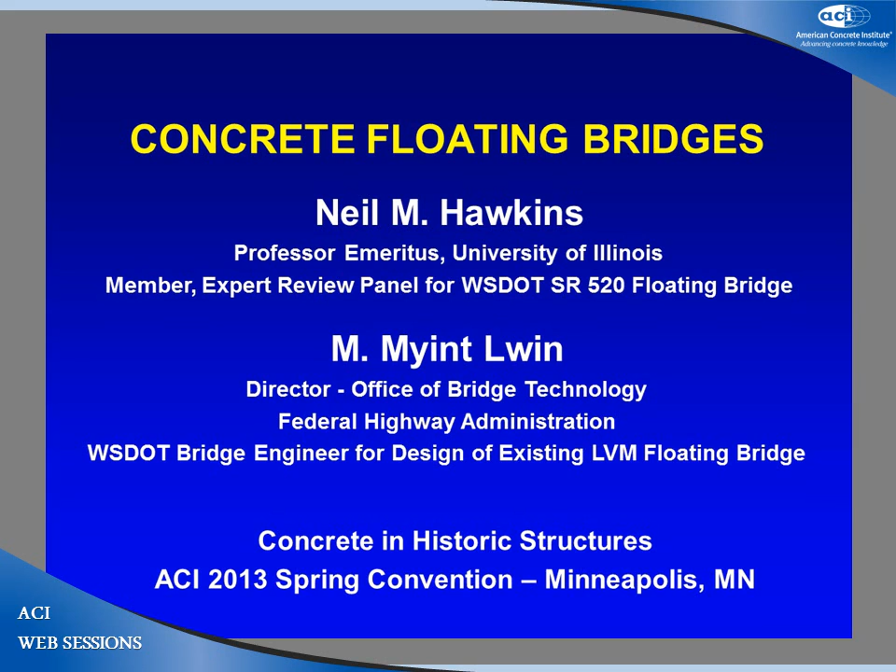Good afternoon, people. I'm a professor emeritus at the University of Illinois, and I've been involved with floating bridges in detail for some 30 years now. Most recent experience was looking at some new construction of a floating bridge in Seattle, which has sort of gone a bit wrong. My co-presenter in this is Myint Lwin, who is the director of the Office of Bridge Technology of the FHWA, and he was the Washington State Design Bridge Engineer for the existing Lacey V. Murrow Bridge, which is the bridge we're going to talk about today.

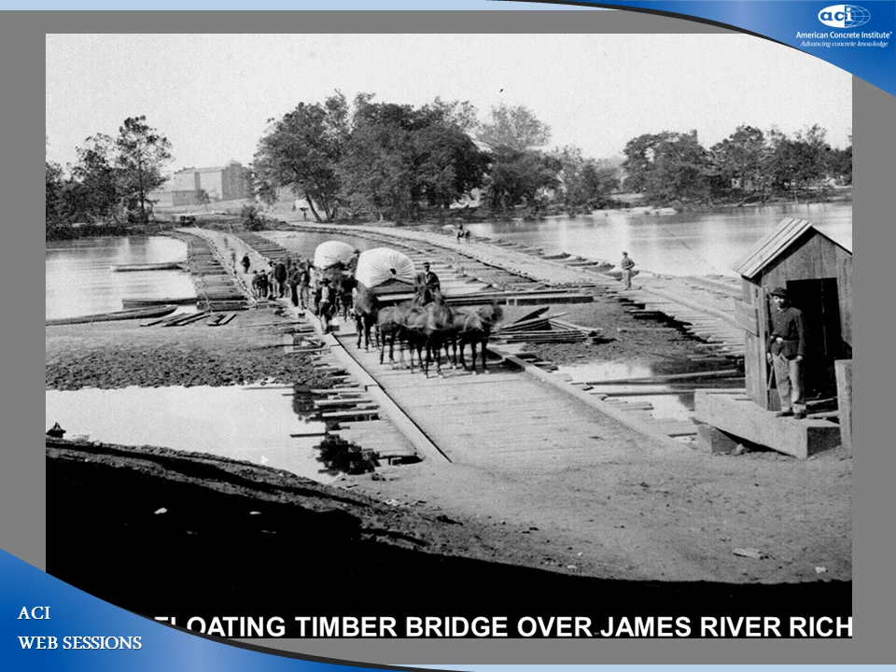Floating bridges have been around for quite a long time. The Romans used floating bridges, Napoleon used floating bridges in many of his battles, and here is one from the Civil War, a floating bridge over the James River in Richmond, Virginia.

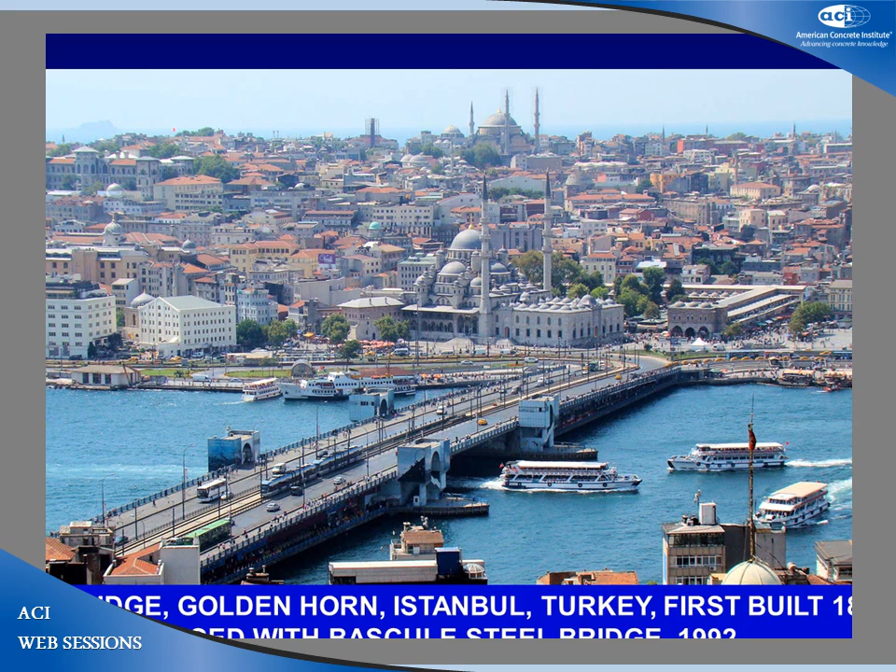Of course, one of our most famous floating bridges is the bridge across the Golden Horn in Istanbul, Turkey. It was first built in the 1800s, but has now been replaced with a bascule steel bridge. I keep suggesting to the Washington State Department of Transportation that they could solve some of their funding problems if they just allowed the construction of restaurants in the space between the pontoons of the floating bridge.

Around the world, there are some 16 different floating bridges which are concrete. I want to point out that in the United States, the main ones are in Washington State. There is one up at Kelowna in British Columbia, and there is another one over in Pearl City in Honolulu. There are some famous, more recent ones in Norway, and you may have seen an article in Concrete Briefs today talking about a new one they're going to build in Norway, which will be a combination of a bridge and a tunnel. So this advances all the time.

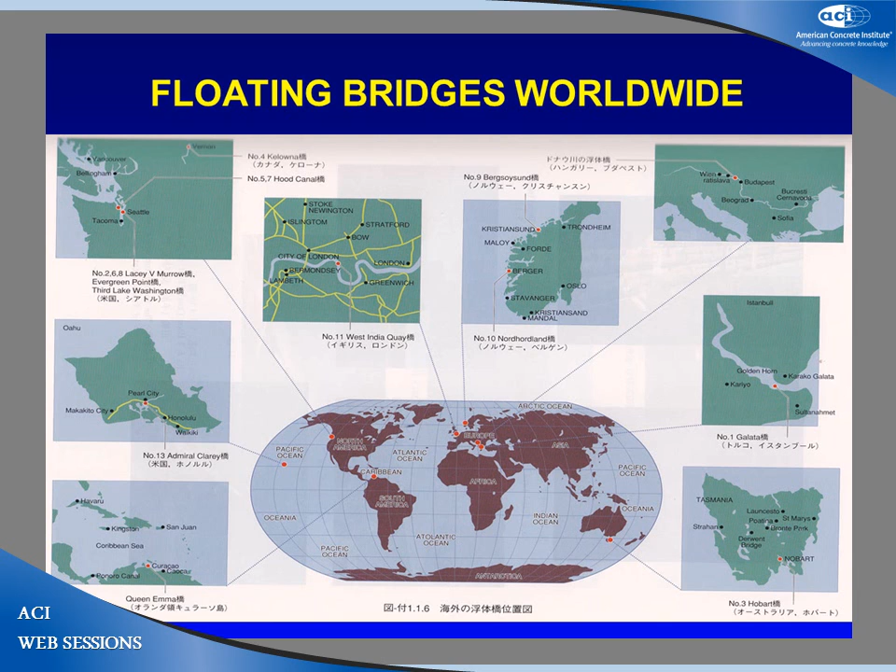Now I'm going to change pace, but this is a significant factor. There are concrete ships. Most people know that there have been concrete ships, but they always come along during a war when we lose a lot of steel. So instead we think, hey, can't we build in concrete? So in World War I, we built 12 concrete ships.

And there's the SS Palo Alto. I give the dimensions: 419 feet long, 54 feet wide, and 35 feet deep. Just carry those dimensions in your head.

In World War II, we had 24 ships. As a graduate of the University of Illinois, most of you will know something there called Talbot Lab, which is where the first concrete experiments were done. There's the SS Arthur Newell Talbot, named after the same person, 336 feet long, 54 feet wide, and 35 feet deep. If you want to look more at concrete ships, go to the URL 'concrete ships' and you'll find a history of every one of these concrete ships and where there may be remains or still floating.

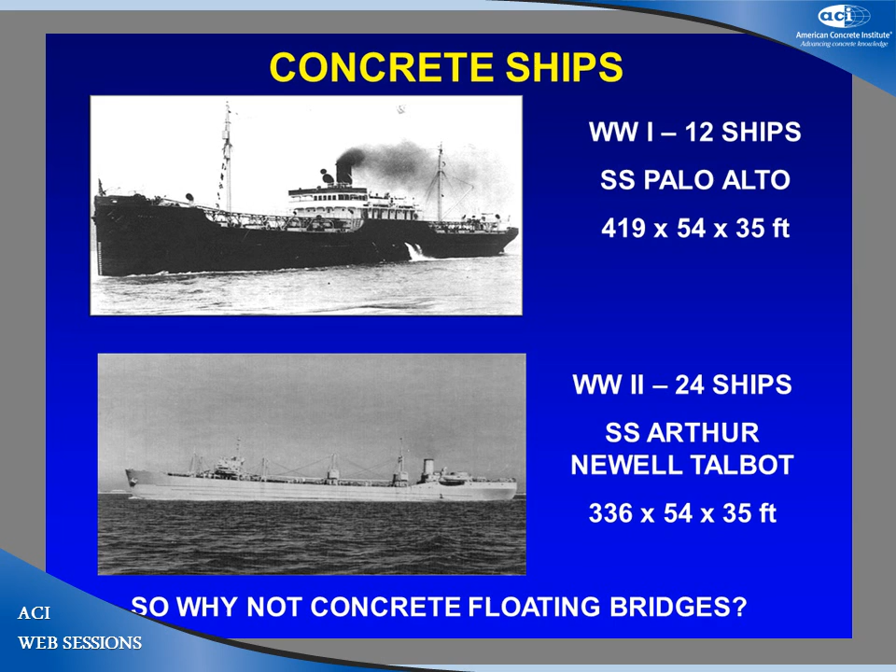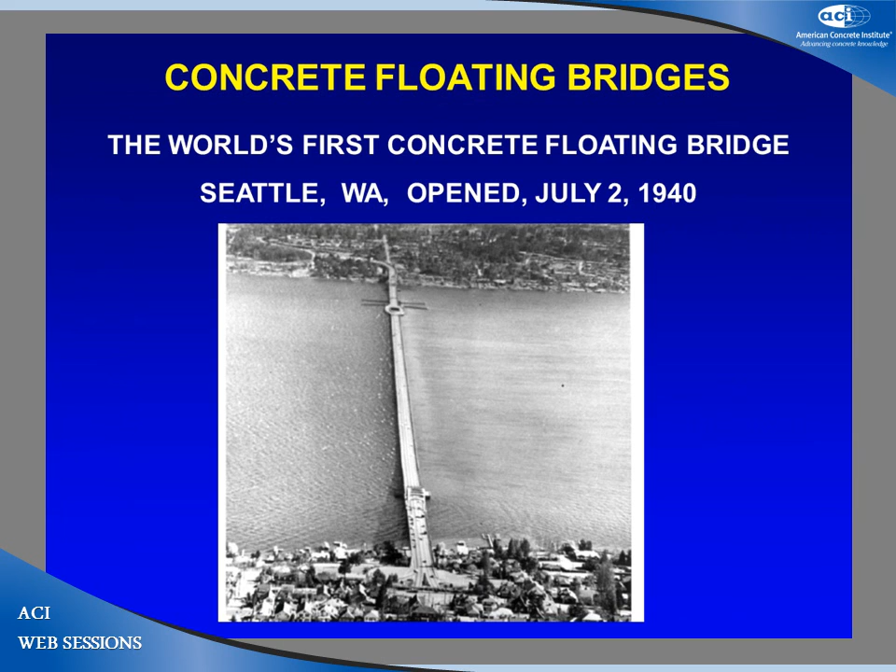So if you could build concrete ships, why not build concrete floating bridges? And that's what happened in Seattle. The world's first concrete floating bridge opened in Seattle on July 2, 1940, and there's a picture of it.

Why build a concrete floating bridge? Seattle had a problem. I really appreciate the last speaker because she talked about Spokane. What we had to do was somehow get from Seattle through the mountains, which are the Cascade Mountains, and there's a pass there of about 3,000 feet. But the rest of the mountains are 8,000 feet, and Mount Rainier is 14,000 feet, and it's pretty difficult. So that was one pass.

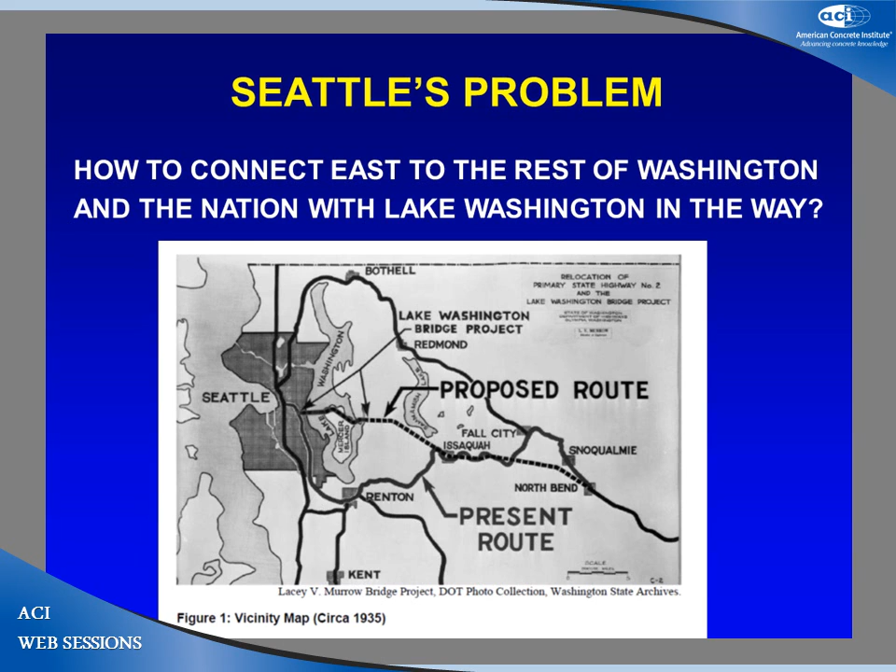But there were a few challenges. First, the depth of the lake and the soils. The lake is a fjord, and it's 200 feet deep, and after you get through the 200 feet of water, you get 200 feet of soft soils in many places, particularly near the banks.

Second, the place had to remain open to shipping, and there was a limit of 10,000 tons on the ship. That's because the Corps of Engineers had built some locks to protect Lake Washington from salt water. Lake Washington is fresh, Puget Sound is salt water, and that size would only take 10,000 ton ships.

But then, of course, you had this problem of winds can develop, and there's a fetch to this site of about 10 miles, and for that, the maximum winds blowing from the southeast could create waves up to 9 feet in height.

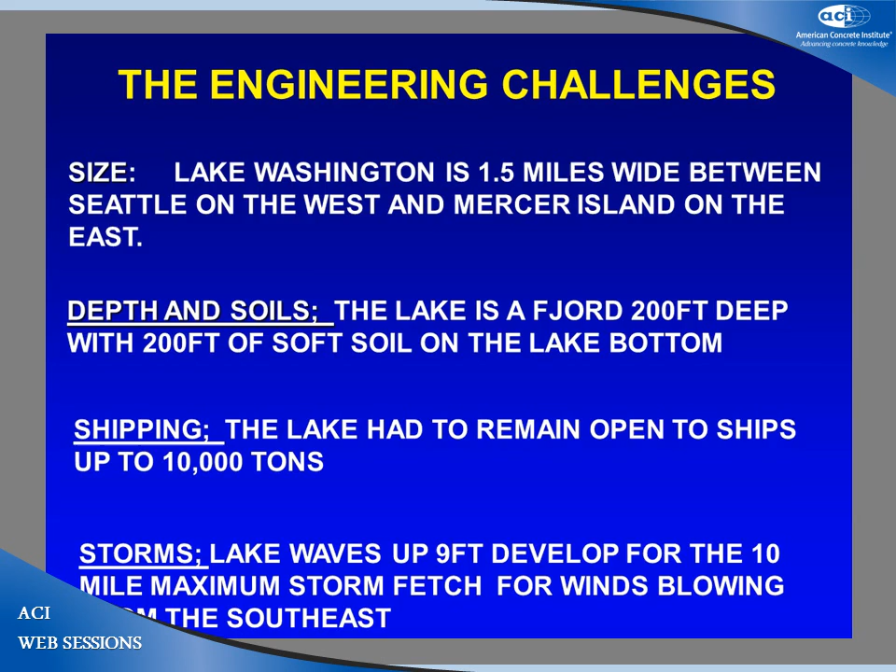So that's a challenge. Along came an innovator, and his name was Homer Hadley. Speaking at an ASCE meeting when he was 36 in 1921, he proposed that they build concrete ships connected together to produce this bridge. He'd worked in the Philadelphia shipyards building those concrete ships in World War I. His proposal was for a bridge made of interconnected concrete barges.

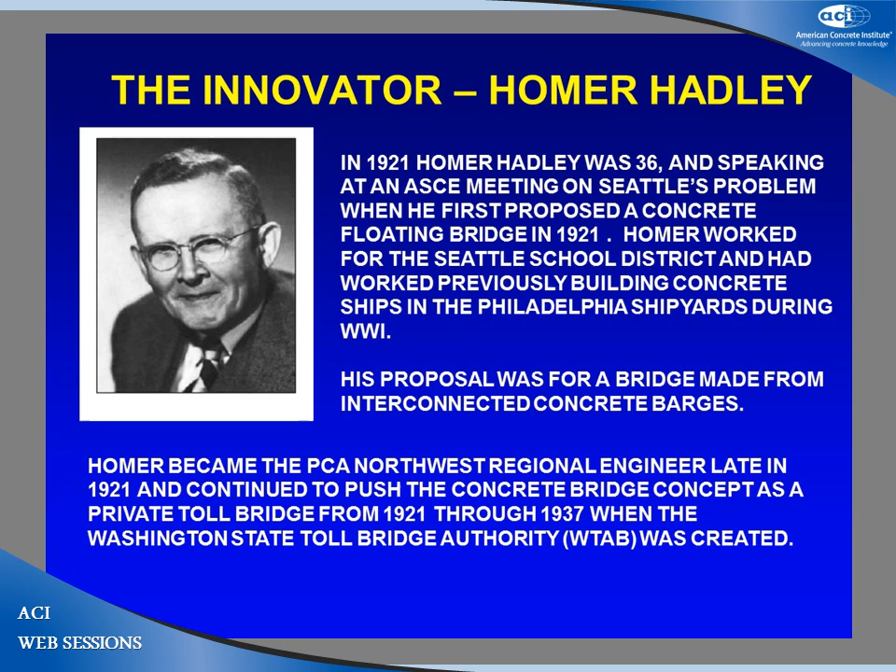Homer became the PCA's Northwest Regional Engineer late in 1921 and continued to push the concrete bridge concept as a private toll bridge from 1921 through 1937. But trying to sell this in the middle of the Depression, well, a concrete bridge salesman has difficulties. Okay, so that's what he did.

Then along came a new, young, bright person called Lacey V. Murrow, and he was very capable and very persuasive. Politically, it was amazing. By the age of 28, he was the director of highways in the state of Washington. And from 1933 to 1948, he was chief engineer of what then became the Washington State Toll Bridge Authority.

And then under his direction, there were two major bridges started. The first, the original Tacoma Narrows Bridge, colloquially called Galloping Gertie. And then this bridge, the Lake Washington floating bridge, the first one, colloquially called Gurgling Gertie.

He resigned his position from the Washington Transportation Authority at a very propitious time, 2 months before the Narrows Bridge failure, and he entered the Air Force. He retired as a brigadier general and served extensively in combat in World War II and in the Korean War, and is now buried in Arlington Cemetery.

He also has a famous brother, Edward R. Murrow, and there he is with his brother in World War II.

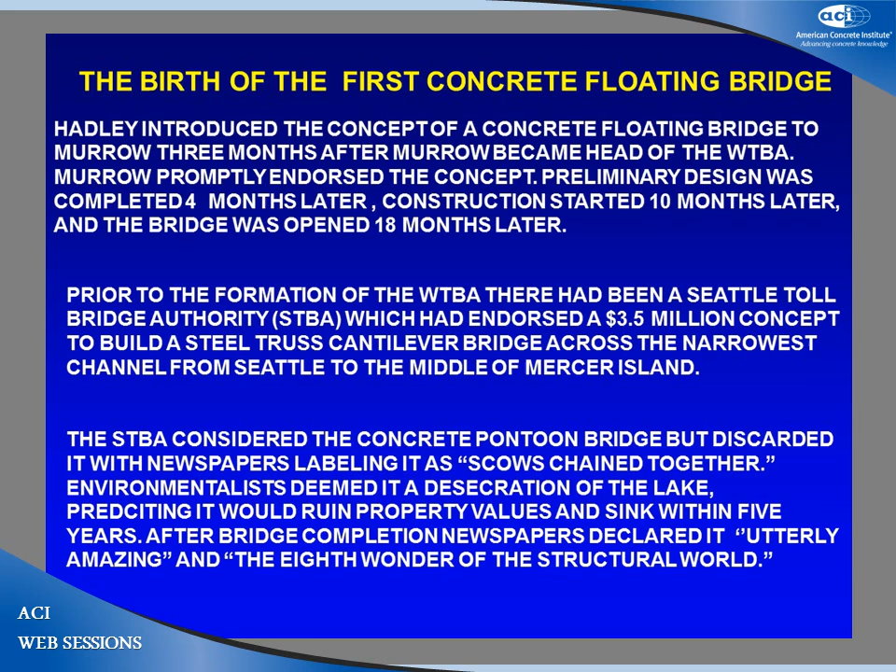The Seattle Toll Bridge Authority considered the concrete pontoon but discarded it, with the newspapers labeling it like scows chained together, and environmentalists deeming it a desecration of the lake and predicting it would ruin property values and sink within 5 years. After completion of the bridge in 1940, the newspapers declared it to be utterly amazing and the eighth wonder of the structural world. So much for newspapers.

All right, so why a floating bridge? The location was the most direct route. The great depth to firm foundation made tower construction very challenging. Because the lakes were controlled by locks, there was a regulated lake height and very little current, so that made water-to-land transitions easy. The whole idea that the thing could be built within 2 years was amazing.

In 1935, the estimated costs were: for the floating bridge, 7 to 10 million. For a suspension bridge, 35 to 50 million. And a tunnel, if they could build it, 50 to 100 million. That gives you some sort of ratio. So the concrete bridge was going to win out. The most recent concrete bridge we're building is estimated to cost 800 million. And why concrete?

Why not wood or steel? Well, the dead load of concrete provides more inertia than a steel or wood floating bridge, and therefore more resistance.

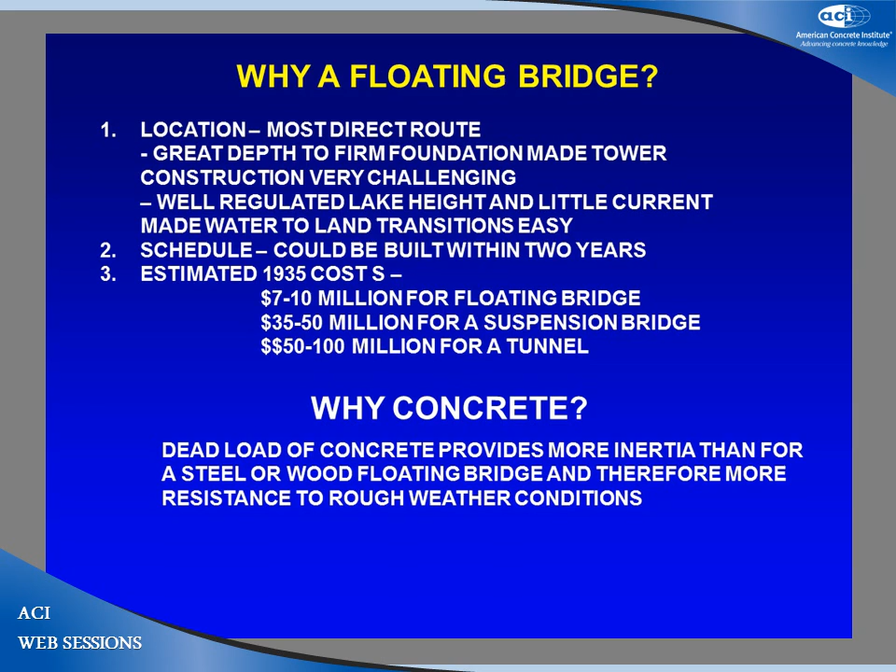To the weather conditions. This is the layout of the 1940 bridge. It's hard to see, but Seattle's on the left, Mercer Island is on the right. You've got the profile of the lakes, and the key features are that it's cellular pontoons with an integral roadway. We now build cellular pontoons but elevate the roadway above it on a separate structure.

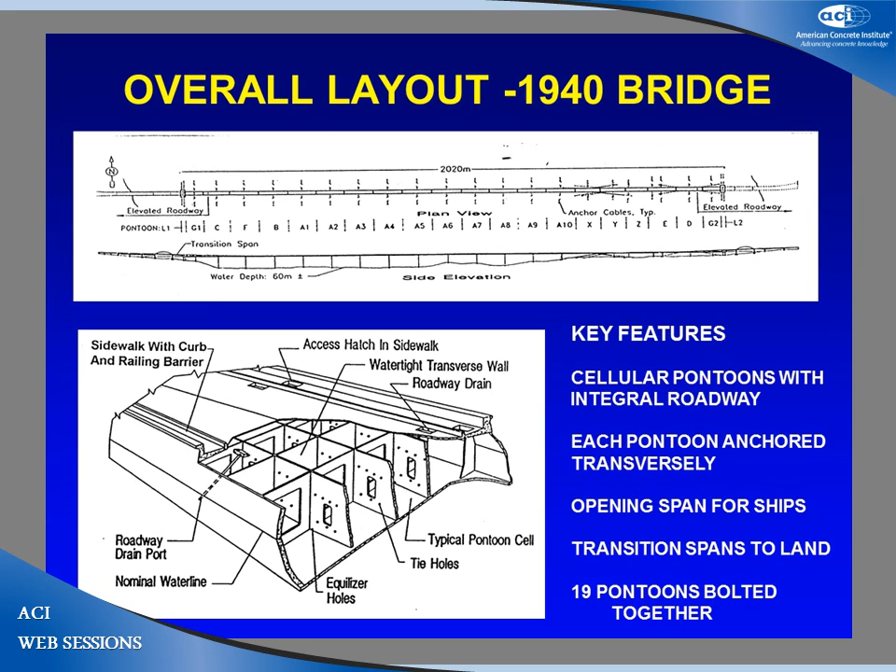Each pontoon is anchored to the lake bottom transversely. You had to have an opening span for ships, and you had a challenge in building the transition spans to the land. The bridge consisted of 19 pontoons bolted together, and the same concept we continue to use in the new bridges built today.

So if we draw the critical elements, you have the pontoon in the middle, the little thing, and long anchor cables that go out. So the anchor offset is about 700 feet, and the anchor tension is typically 120 kips.

So we're building another one of these, a cross-section of which is shown down there at the bottom. If you look at where these anchors are going to be, they've dropped anchors down now, and the whole lake looks like massive lobster pots all the way across it, because they're going to pick up these things and thread those chains through afterwards.

The pontoon dimensions, look at them: 1940, 359 feet long by 59 feet wide by 14 and 2/3 feet deep. Doesn't it remind you of a concrete ship from World War I?

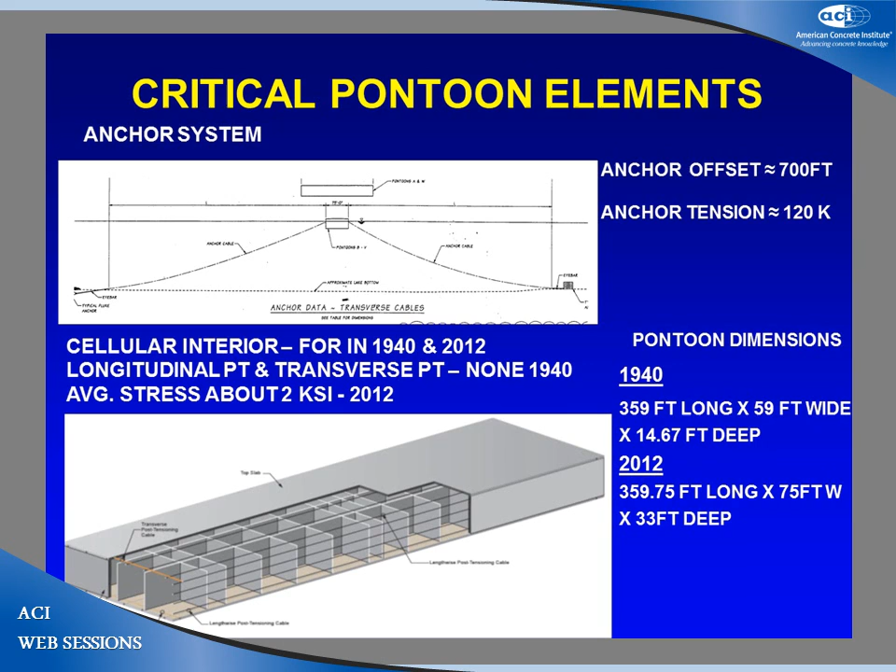And then in 2012, we've advanced a lot. We've gone to 359.75 feet long, 75 feet wide, so a bit wider there, and 33 feet deep, because we're putting so much more load on each one of those pontoons. We follow the same type of construction.

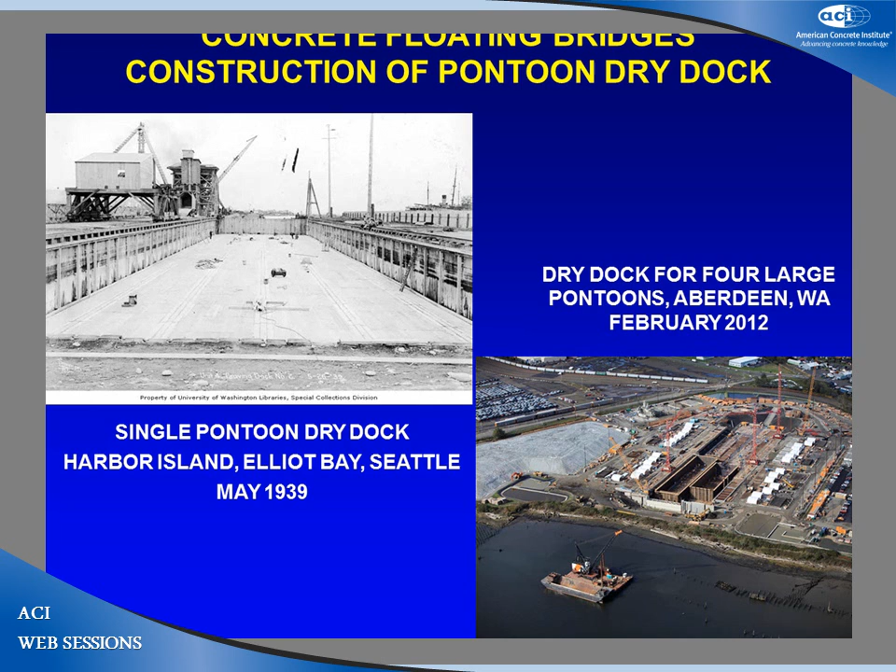On the left, we have the dry dock for the original construction, which was built at Harbour Island in Elliott Bay in May 1939. On the right, we have the current dry dock for construction of the pontoons in Aberdeen, Washington, picture from February 2012, and we're building four pontoons at one time.

The first construction was almost a continuous pour for the Lacey V. Murrow Bridge in 1940. 36 hours was the time it took to pour the first pontoon, always wheelbarrows dumped into the formwork.

Now it's so much deeper, it takes so much longer, and they do it in 6 different sections.

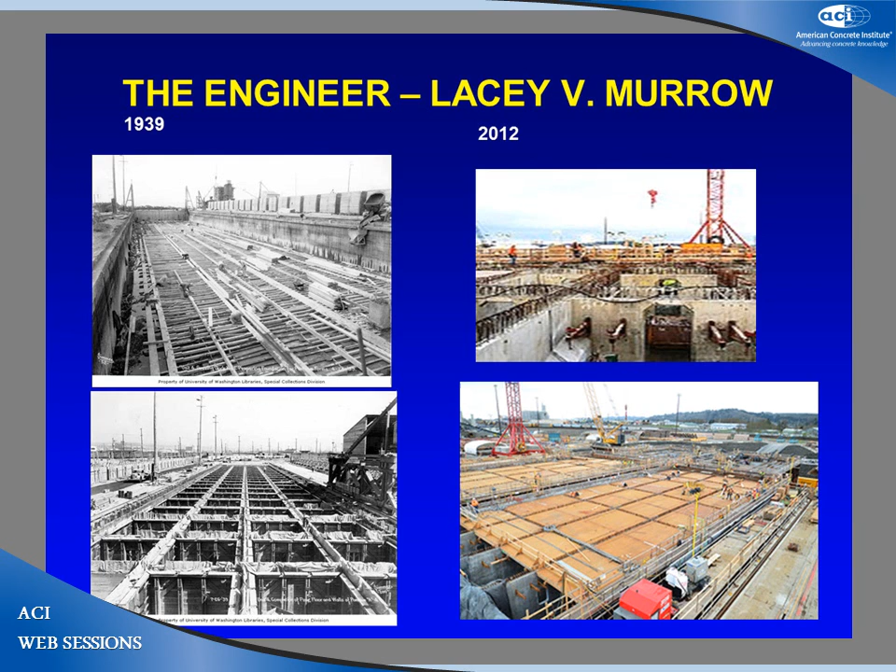We have to build these anchors. On the left, we see what was done in the 1940s. The pontoon is not nearly of the same depth, but you have to take this anchor and put it through the middle of the pontoon, which is the steel bit you see there, and then they're forming up the wall underneath that steel bit. Then you have to lower down the anchor into the water.

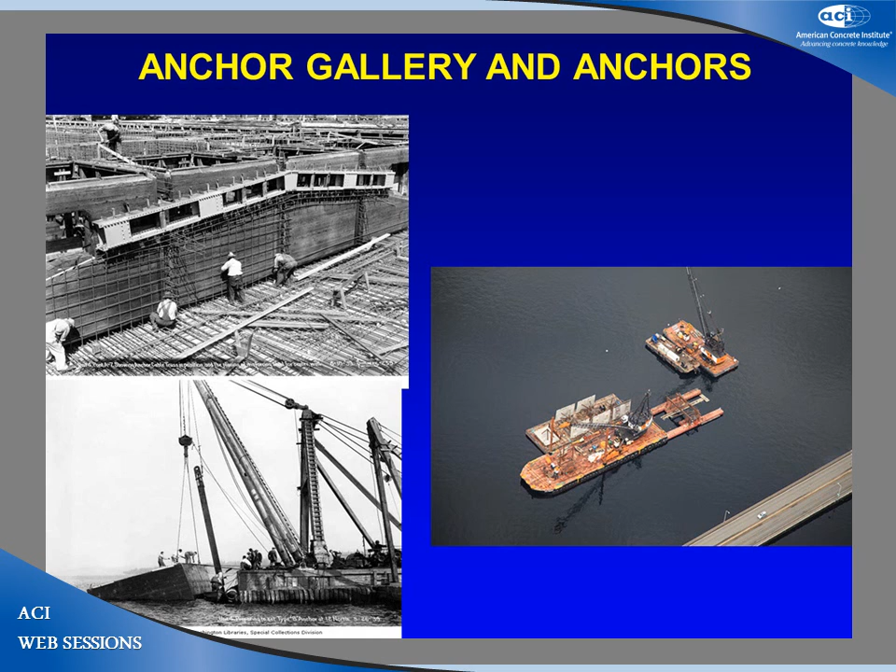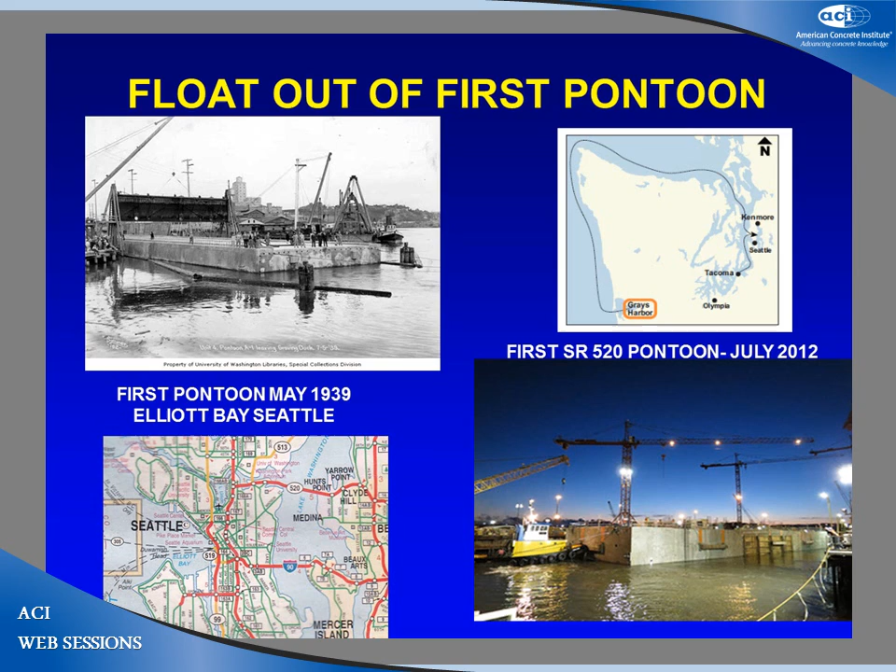Of course, it also means that the pontoon spends quite a bit of time in salt water before it ever gets to the fresh water of Lake Washington, and that's why you don't want it to crack.

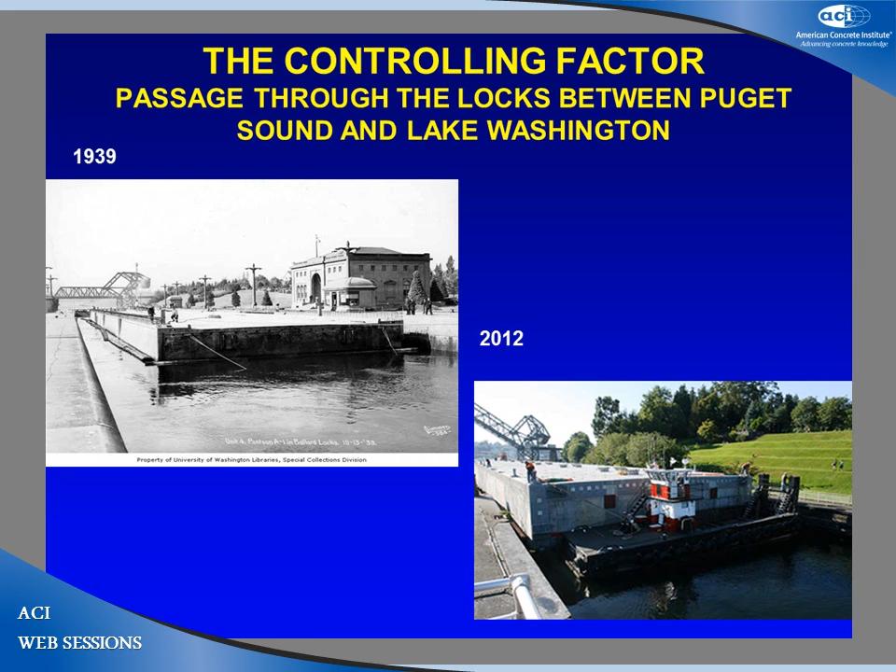To retrofit the next ones coming through, we've had to post tension top and bottom in the transverse walls, reducing it to 6 inches either side.

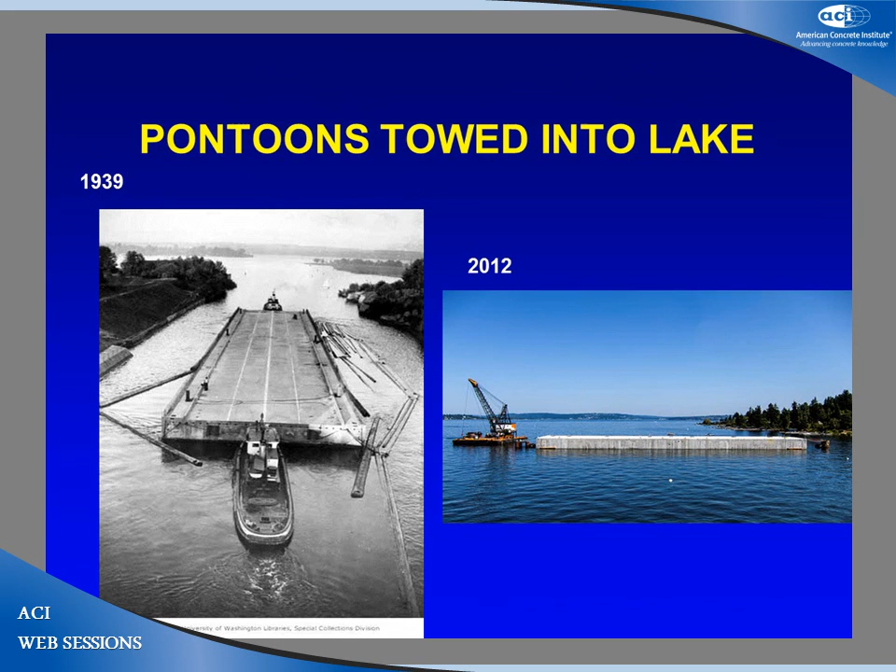That one still has to come through the locks. It'll be interesting—they're then towed through the ship canal, past the University of Washington. This is the original pontoon with the roadway in place. Now we've got the pontoon for the new bridge sitting out on the lake without any roadway yet put on it, and much opportunity for restaurants.

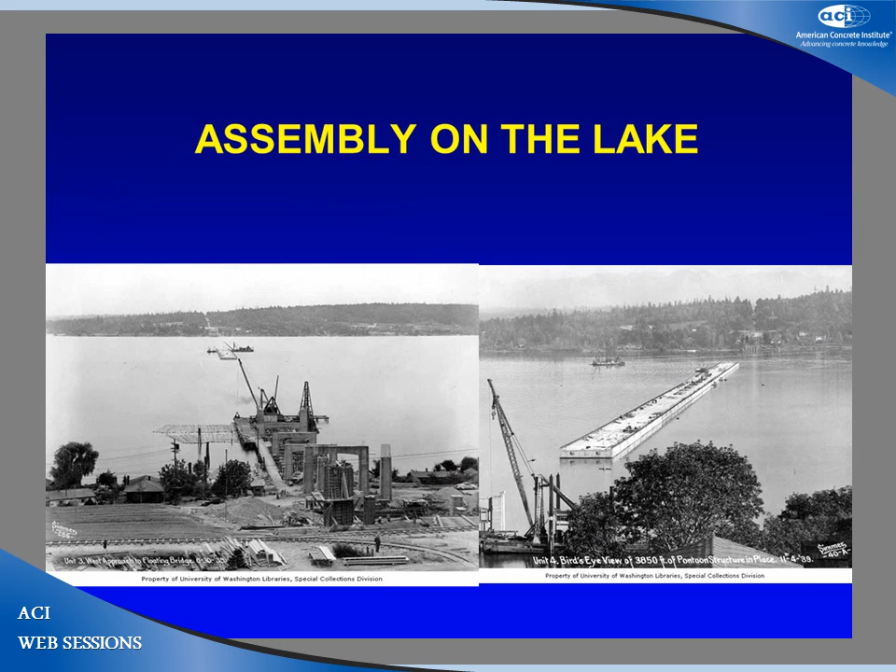When this bridge blew down in a storm while it was being retrofitted in 1990, the first pontoon that broke was in the middle—that was also the first pontoon that had been constructed.

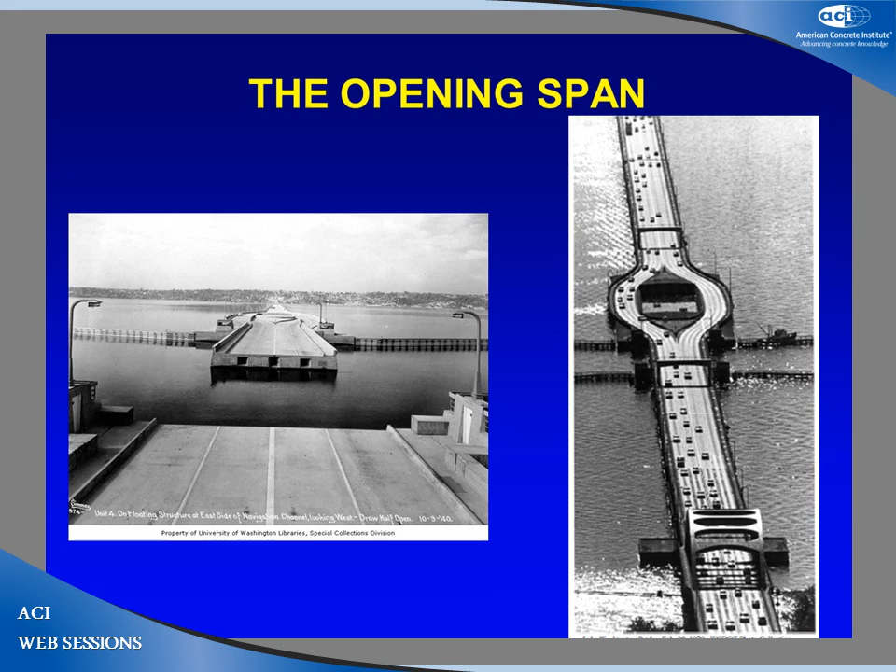Here's the opening day, July 2nd, 1940. A great accomplishment—everybody was very happy.

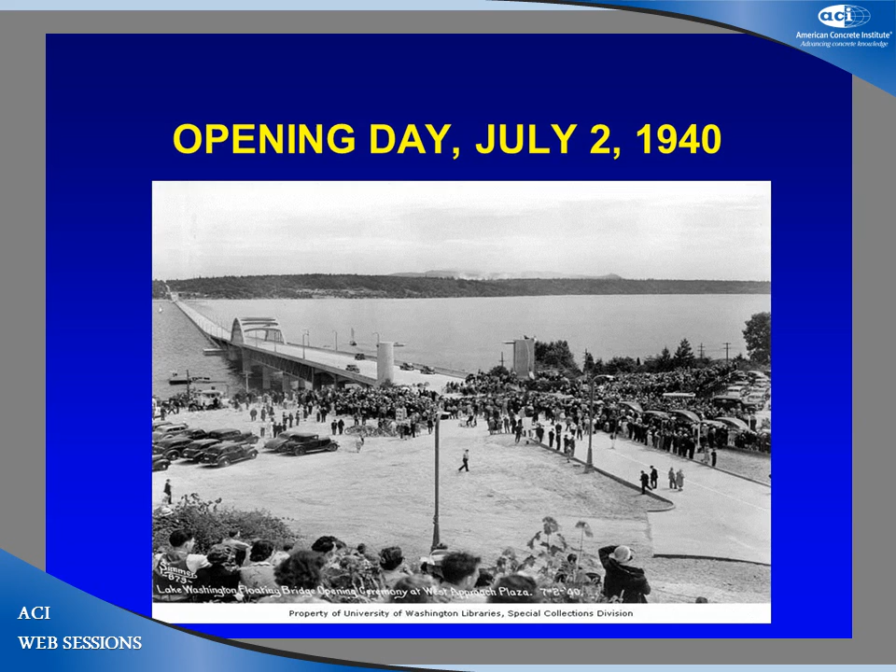What we've got now is the longest bridge, the State Route 520 Evergreen Point Bridge. The total length of the bridge is 12,404 feet. The floating length is 7,578 feet. The bridge has a much longer fetch, so it's regularly subject to strong winter storms.

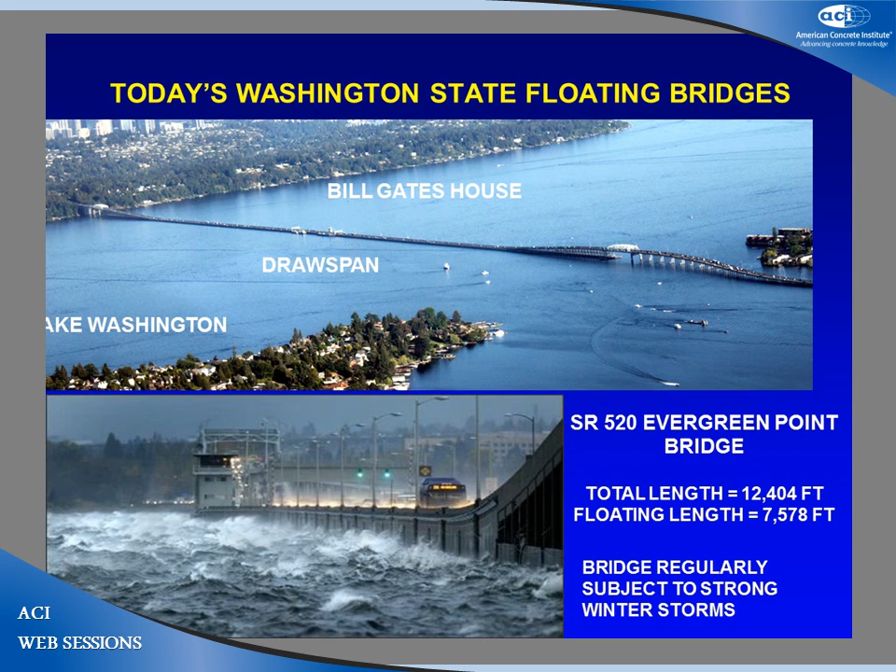It's rather a challenge driving across it in a strong winter storm because it's like a ship—it rolls and throws water over your car and everything else.

The next one they did was the Hood Canal Bridge, a salt water arm that comes off Puget Sound, off the Strait of Juan de Fuca. Half of that blew down around 1980, so they replaced it. There was the east half, which remained, and then they put in a new west half.

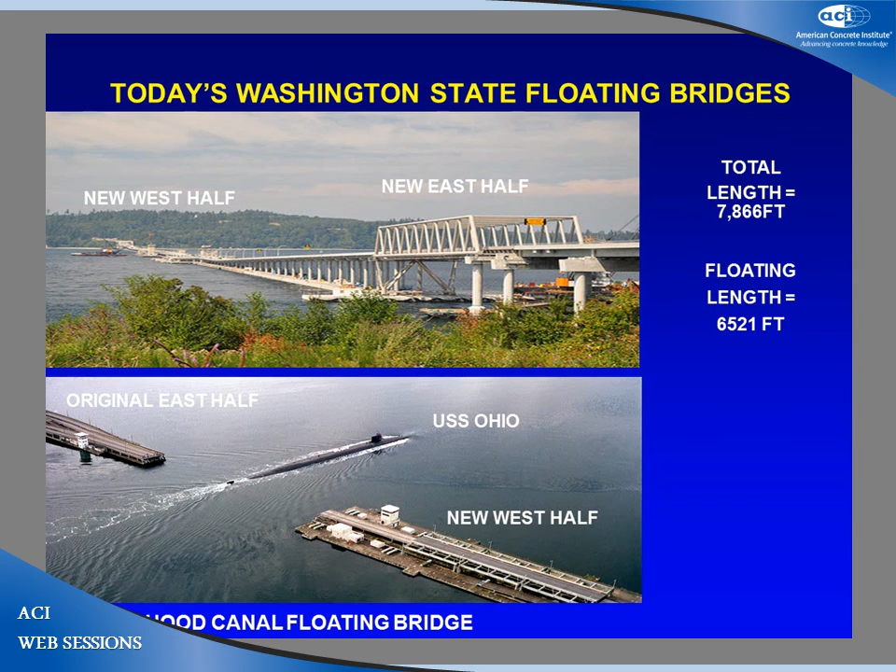Upstream of the Hood Canal Bridge is the Silverdale Trident submarine base. So they open this bridge, and there's a nuclear submarine, USS Ohio, going through it—another challenge, having allowance for nuclear submarines.

I'm glad to answer questions.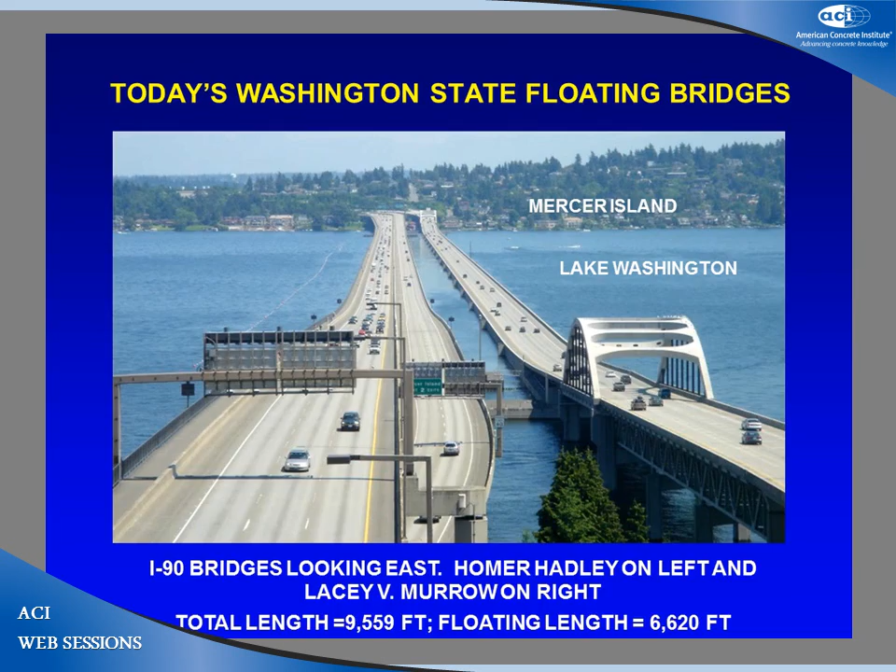Do you have any problems with corrosion? Typically on a concrete bridge with piers, the tidal zone is kind of the worst area.

It seems like this would be everywhere—splashed up? First of all, the bigger bridges are in Lake Washington, which is freshwater. Only the Hood Canal Bridge is in saltwater.

Do we have corrosion problems? Yes. Are we worried about corrosion problems? Very much so. After that 2-day tow of the new pontoons, which unfortunately cracked at the ends in some positions, there's concern that water has seeped into the crack and will attack the reinforcing.

When the original bridge sank and we broke bits apart, it was amazing how good the original reinforcing bars still looked in that bridge.

Do you have to have bilge pumps in the pontoons? So you anticipate water to leak in and then you have to pump it out? The original bridge had no bilge pumps. It had openings about 6 inches above the bottom, so water could flow from one cell to another.